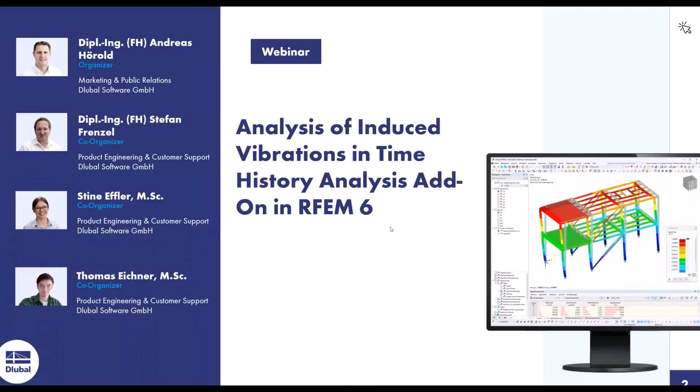So hopefully you can see my screen. Okay, we go directly to the content. As we said in the introduction, we want to have a look today at the new time history analysis add-on. I want to show you the features of the new time history analysis add-on in RFEM 6. So today I want to give you an overview of the dynamic analysis add-ons which we now have in RFEM 6 or RSTAB 9.

Then in the next step, we want to do a natural frequency analysis of a structure using the Modal Analysis add-on. This is part of the dynamic add-ons we have in the program. We want to do it for a building like the one you see on the screen, made out of concrete and steel.

The next step of our example is to perform a time history analysis with a machine-induced vibration. Therefore we use the Time History Analysis add-on to separate the loads, horizontal and vertical, and to give them a time stamp to get a result. When we are done with this, I want to show you how to optimize the structure in the case of resonance.

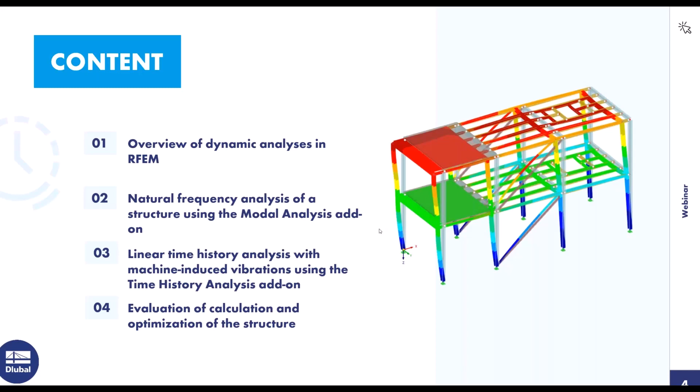Okay, so on the next one you see the add-on modules we have in RFEM 6 and RSTAB 9. The first one on the left side is the Modal Analysis. This is a basic tool in RFEM 6 to calculate the eigenvalues of the structure. You get the equivalent load factor and the eigenfrequencies of the structure, which is a really important tool, because to use the other dynamic analysis tools, you need the modal analysis.

The next one we released was the Response Spectrum Analysis add-on. With this add-on, it is possible to do a response spectrum analysis, for example in case of earthquakes. It's a linear calculation in this case.

Here you can, of course, choose a response spectrum according to a design code, for example the Eurocode or the US code or some other codes, what you want to use. You can also create your own response spectra, maybe also out of accelerograms if you want to do this, and then the program will calculate for each FE mesh point internally an equivalent earthquake load, and then you will get at the end, of course, the internal forces for the directions and also the combined reactions of the whole structure.

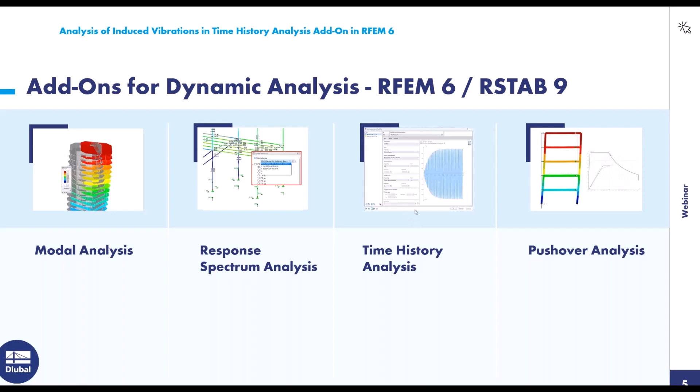And last but not least, the add-on module is the time history analysis add-on. In this add-on, you are able to combine time with loads and to get a result out of that. And this one we want to do today, and therefore I created a small example. This is our practical example.

It's a machine-induced vibration. So just as an introduction, that's a normal steel frame structure with the concrete surfaces on this side. And we have here a machine which induces a vibration on the structure with a rotating unbalance of 0.2 kilonewtons and a frequency of 5.6 hertz. And then we want to see what happens to the structure when we bring this load with the frequency on the structure.

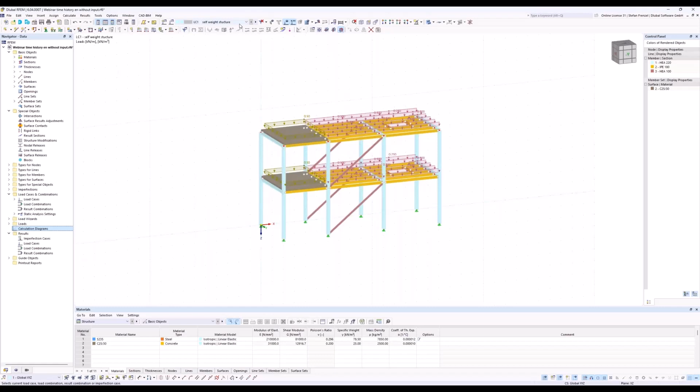Here in RFEM 6, you see at first our structure and also some loads, the self-weight of the structure. And I created also a self-weight of the machine in this case. And I created some horizontal induced load and a vertical induced load, this one and this one. I will show you later how to calculate this. But in the first step, we want to do a modal analysis for this structure.

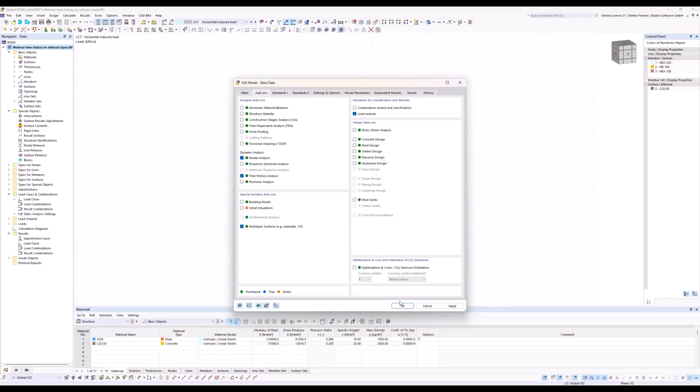Therefore, you are able in the program to go in the base settings of your file, and in the base data you are able to activate add-ons. In our case, we want to activate the add-on for the dynamic analysis, modal analysis and the time history analysis, because we want to use them afterwards also. You see that in RFEM 6 you are able to activate different add-on modules, for dynamic analysis, or for design of structures, for example for steel or concrete. You're able to switch them off and on in the add-on tab in the base data of the program. So in our case, we want to do this, and we say okay.

And now we want to do a modal analysis for our structure. How can we do this easily? That's the first question. Therefore, I go to the load cases and go at first on edit. You see that we have 4 different load cases. For my modal analysis, normally I need 2 load cases.

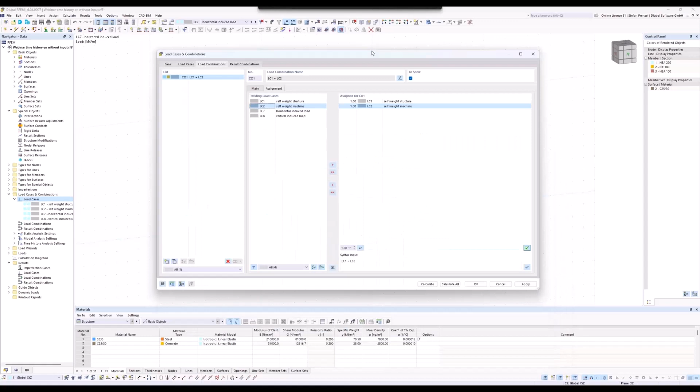That makes it a little bit different because here I have to create at first a load combination to assign these 2 load cases. I want to assign load case 1 and load case 2 because in this case I want to have a look on the eigenvalues of the structure when the self-weight of the structure and the self-weight of the machine is available, and therefore I took these 2 load cases for that.

It's not necessary to choose another static analysis setting here, because for the modal analysis we just use the masses which are in the vertical direction, or in Z direction. So therefore we can go back to the load cases, and here we create a new load case. It's load case number 9 now.

If you want to perform a modal analysis in the program, you just have to switch the analysis type to modal analysis. If you switch this, you will have a new option, which are the modal analysis settings. And of course, the program wants to know which self-weight or which load should be used for the modal analysis. If you have a load case with loads in it, the program will automatically convert the loads into masses. But it's also possible to create masses in the load cases, and then you can use these masses.

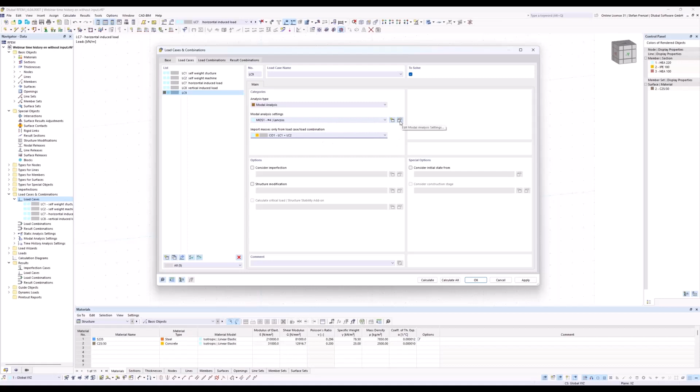In our case, we want to use load combination number 1, which is made out of load case 1 and load case 2 together. And these masses we want to use now for the modal analysis. I just have to go into the modal analysis settings, because for this modal analysis I need a number of modes. It's not 4, it's 30. So I need 30 eigenmodes for the calculation. I know this because I did it before, of course.

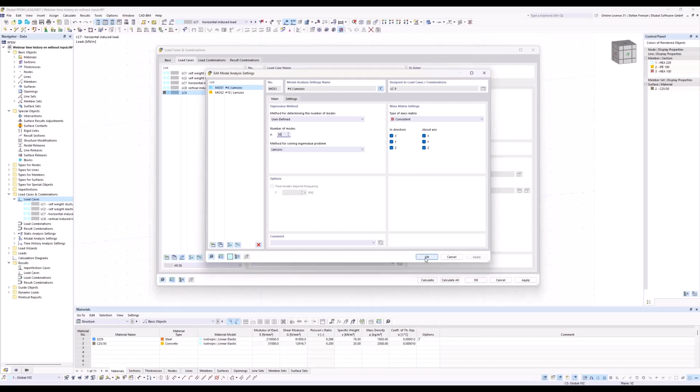Otherwise, you have to choose your own value, or you have to prove it, of course. The mass matrix should be consistent. That means the masses are distributed on the members via a function. That's normally the best way, because it considers the masses most exactly on the structure. Then we can click OK, and we can do a calculation.

Now you see the program will mesh the structure first, and then the program will calculate load case number 9. It's not necessary to calculate load cases 1, 2, or the load combination, because we just took the masses from these load cases or load combinations. Our first natural frequency you can find in the result navigator. Here you can switch to the eigenvalues. But here's a really good eigenvalue.

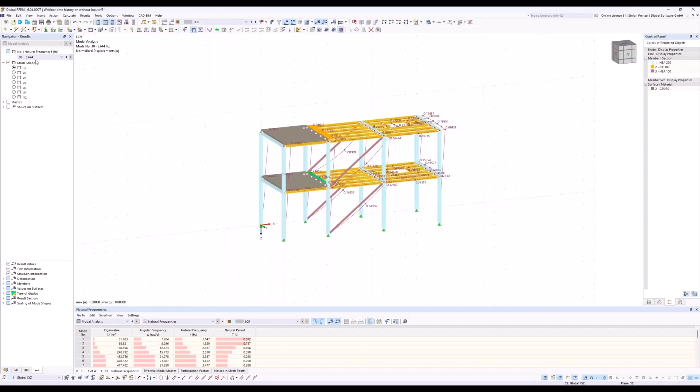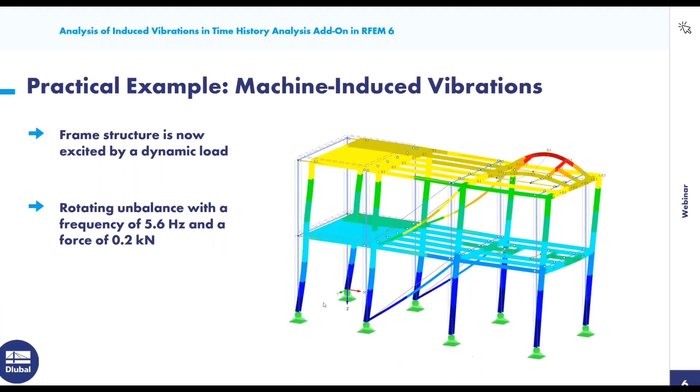It's also 5.6 hertz. It's like our induced vibration, and you can see the structure will move in x direction globally. That's normally not so good when you get this. So I will switch back to the presentation.

We have to define now the input values for the time history analysis. I told you that we want to use 0.2 kilonewtons as rotational mass, or as unbalanced mass of the machine. I have to calculate these 0.2 kilonewtons to the member length, and then we get 0.025 kilonewtons per meter. And this I bring onto the structure in load cases number 7 and 8. You see here the 0.025, and here also I just divided it by the member length where the machine stands on, and then I calculate this value.

If I go back to the input values, I have to define now two diagrams, one for the horizontal and one for the vertical. The difference between them is just a shift of pi/2. By the rotation of the mass, I have a vertical maximum load and a horizontal maximum load, and it's described by a circle. That means I have to use a sine function for that.

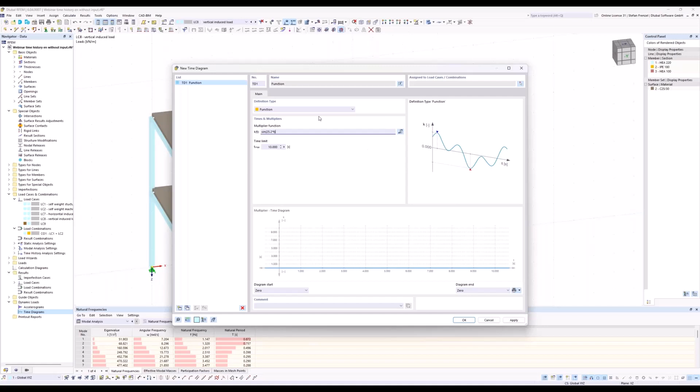The other option is that we can use a function. In our case, we want to use the function because it's a really easy function. It's just the sine of 35.2 multiplied by the time. That's all. And then you should get the result for it. So we want to get a sine function.

In this case, we don't call it function. I just want to call it horizontal part. Sorry, there's an R. Like this. And I copy the whole function again, and here I just add the value 1.5708 to get the shift. And I will change the name to vertical part.

So these two functions describe the induced vibration of my structure. Nothing else. Here you see the shift between them. Here we start with a maximum, and in this one we start with 0. That's the same as in my circle: when I have a maximum force in one direction, then the force in the other direction is 0.

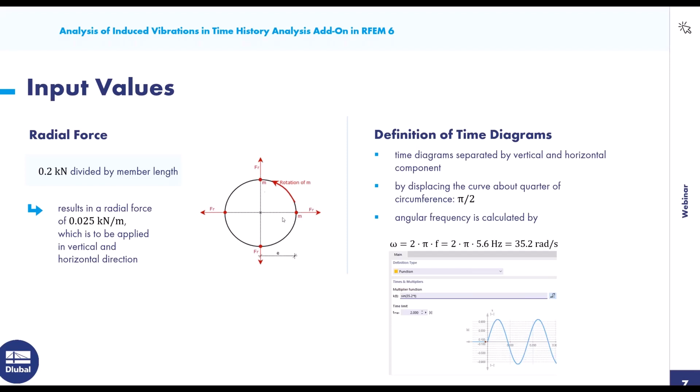And if I rotate further, by 90 degrees, then the other one is maximum and the first one is 0. Therefore, I use the function to get the same behavior, like in my presentation.

Sorry for the interruption. In the PowerPoint, you used 35 rad, and here... Oh yeah, that's correct. 35. That was my fault, just a typing error on my side. No, I also have it on my paper here, 35.2. Okay, thank you for the interruption. Then we can go on. I changed it to the value 35.2.

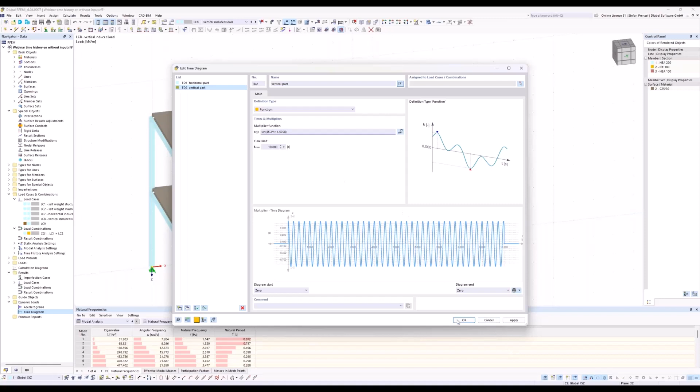In the next step I want to show you that we have an angular frequency of 35.4, which is near 35.2. That means I could get a resonance in the whole calculation, because of the horizontal part, my horizontal load. If I look at this eigenvalue, I go to load case number 9 and see a deflection also in the x direction. So you have to be careful; there could be a resonance in the structure.

So with this knowledge, we go now to the time history analysis to show, hopefully, that there's a resonance in the structure. Therefore, we create a new load combination, and in it we can change the analysis type to time history analysis. That means we can assign load cases, and to each load case we can assign a time diagram.

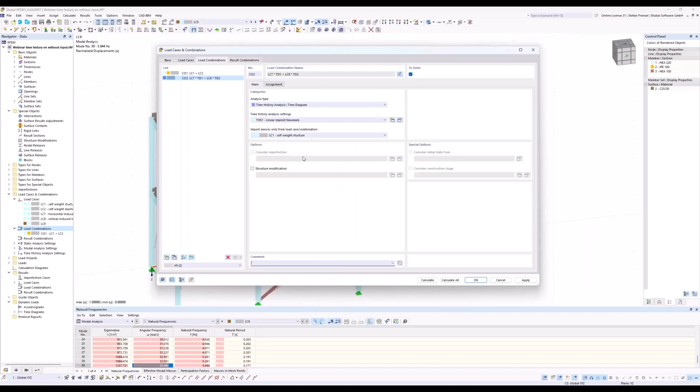And that's our input. We have a horizontal load with a time diagram, and a vertical induced load with the vertical part of the time diagram. That's normally all, because now we can induce the machine unbalanced load to the structure over time.

We just have to change some time history analysis settings, because here we want to use the linear modal. The damping should be 0; we don't need damping at first. For the maximum time, it's okay to take 5 seconds.

The split safe time steps should be 10. That's a good value, and that's normally all for this one. Then we can say here, okay.

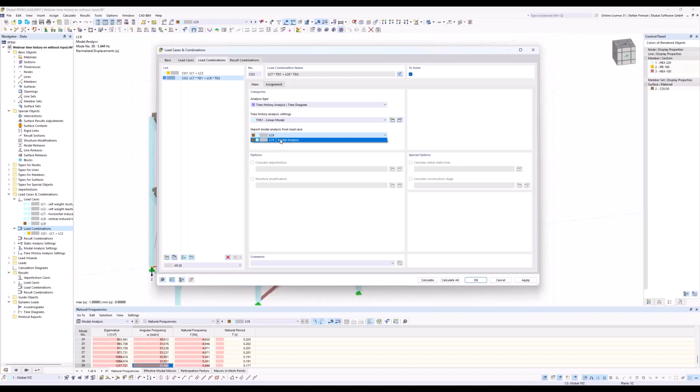If I use the linear modal analysis for the time history analysis, I have to choose here the result of a modal analysis. That means for me, I just have one load case with a modal analysis, so I can just use this one. Then we can click on OK and calculate the whole stuff.

The program will now perform the time history analysis over 5 seconds with a delta t of 0.01 seconds. There will be a lot of results created, but in this case it's necessary because I have 5.6 Hertz as induced vibration, and therefore I need a small time step.

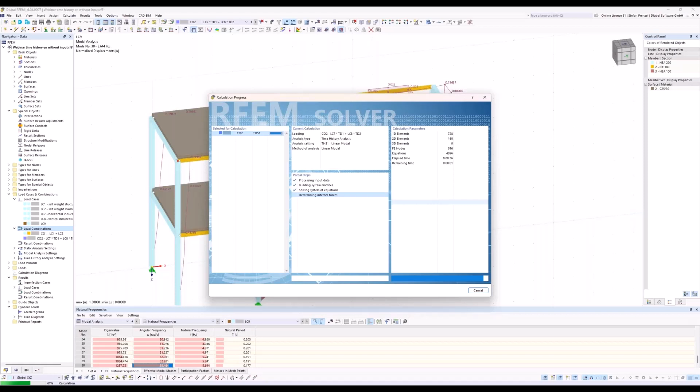So, okay, 35 seconds, it was not so long. Okay, so what's the result of that now?

The results are also like in RFEM5, or like in the old program. You get the results here as a summary in the global table of the structure, and maybe some of you know or used the old one, where it was possible to create also directly a diagram.

Now it makes sense to have a look at a diagram, because here I can't see anything. I can switch through my time steps, but that doesn't make much sense, because normally I pick one point and want to see this point over time. What happens to this point?

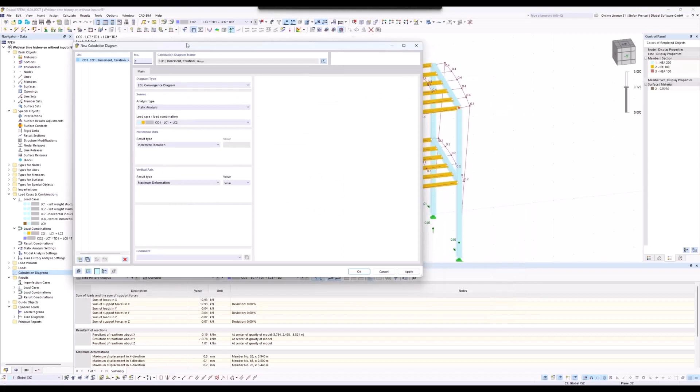For this, we have calculation diagrams, which you can find in the data navigator. If you click on new calculation diagram, you can say you want a basic diagram, 2D. We want a diagram from the time history analysis, load combination number 2.

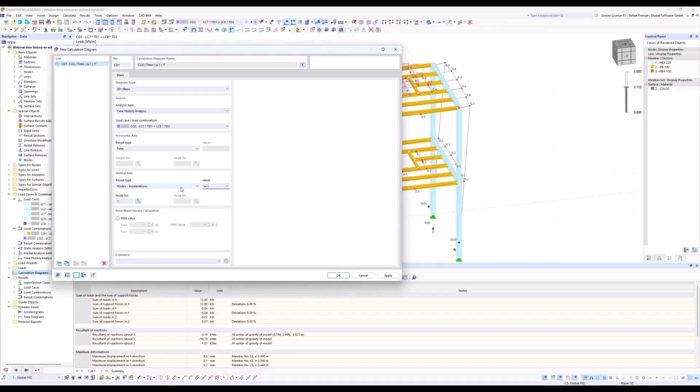That's correct. Here, for example, I want to have a look at the node's accelerations. That makes sense normally, so I take this one, okay, and I just have to click on a node. Maybe I want to look at this node.

That looks not so nice. Maybe we take this one. No, wait, X. X looks nice, so the X direction. The other one here is made out of all directions, therefore it looks a little bit strange.

In our case, we should look at the acceleration in X direction, and here we can see a nice picture of a resonance calculation. The resonance is really high.

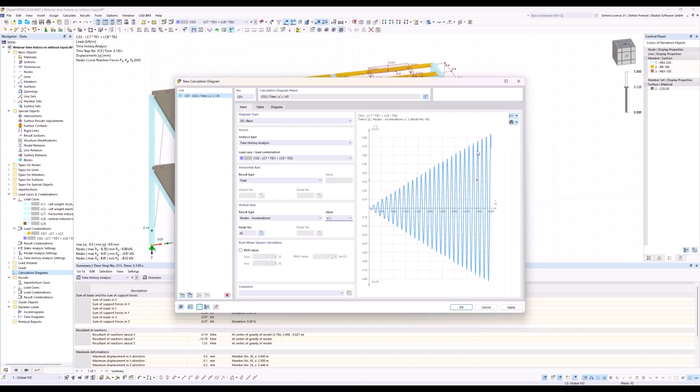So we will get a resonance in the structure, and that's not so good, because now our structure can get a failure by this.

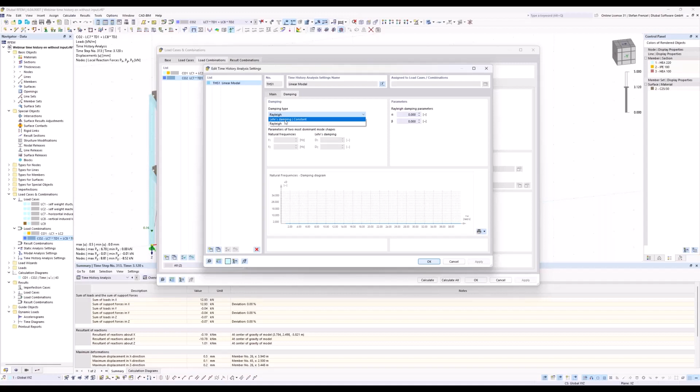What we can do now is go to our load combination number 2, and say, okay, normally if you do a time history analysis, there is also a damping. Here in our case, if we use the modal analysis type, or the linear modal analysis for the time history analysis, we are able to use the Lehr's damping.

I want to use a damping of 0.02. If I use here not the linear, if I use the linear implicit Newmark solver for that, then I'm just able to use the Rayleigh damping coefficients. Therefore, I have to calculate them first. This is easier because you also find it in the literature.

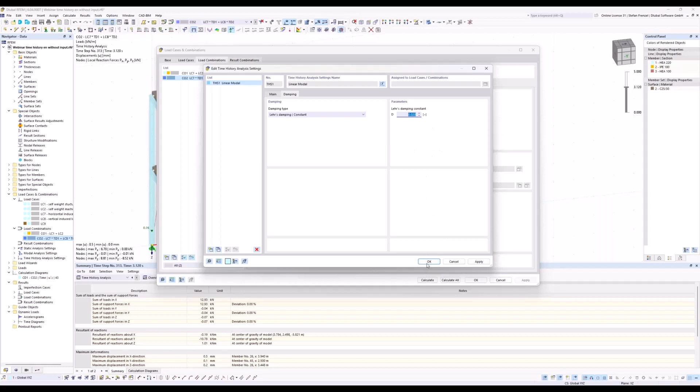You find damping values, or Rayleigh damping values, for structures made out of steel or concrete. In our case, we want to use 2% of that, and then we just have to recalculate the whole stuff. That means we just calculate load combination number 2 again, and then we will hopefully get a result as well.

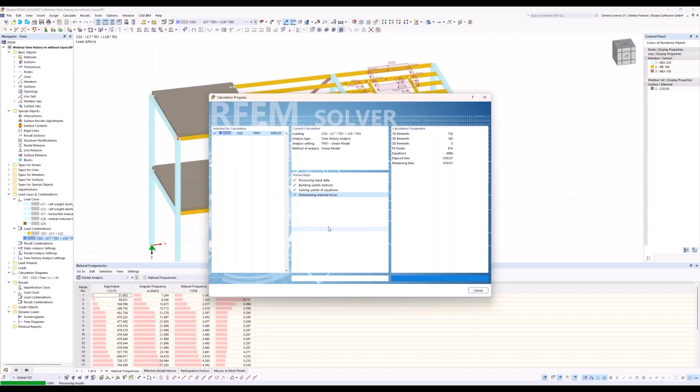So, okay, now we are nearly ready. Okay, so we see that we see nothing.

So really, that's why we go back here in time on the calculation diagram. And within the calculation diagram, I see now here a maximum of 0.24 meters per square second.

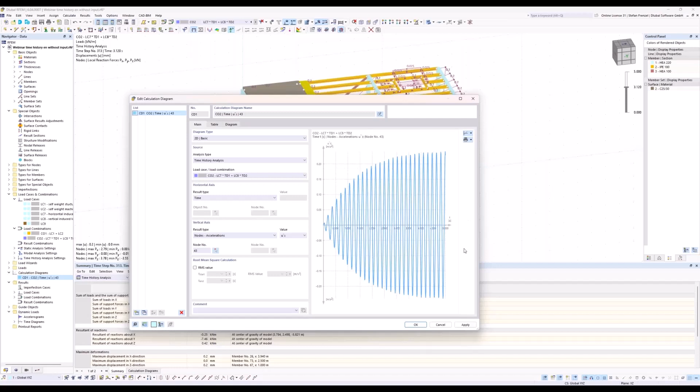That's of course a high value, and that could be, of course, also by using the damping, that it's not sufficient for us or for using the whole building like this. So now we come to the point where we have to optimize normally the structure.

One optimization could be we use another machine, because if we have another induced vibration, then maybe it could work. But normally, it's also possible to change something in the structure.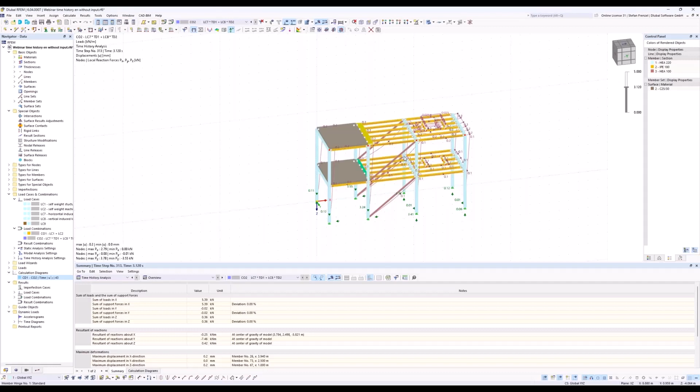Here in this structure, I want to change the bracings because here maybe I took here another axial stiffness for these ones. Then of course the eigenvalues of the structure will change, and hopefully it's then possible to use the same machine, maybe with another bracing or another cross section type for that.

But how can we perform such an analysis? Therefore, we have to go at first into the special objects. In the special objects, we are able to create here a structure modification. A structure modification could be here for sections.

In our case, we want to change the sections, and we know that our HEA 100 is here the bracing. Here we want to use, for example, double the stiffness of the area, or we want to use the double area for that.

That means for us, of course, the axial stiffness will be doubled. And another option could also be that we copy the structure modification and say, okay, maybe we take just half of the stiffness for that. Could be also an option for us, because an HEA 100 is maybe too big, this cross section type, in this case.

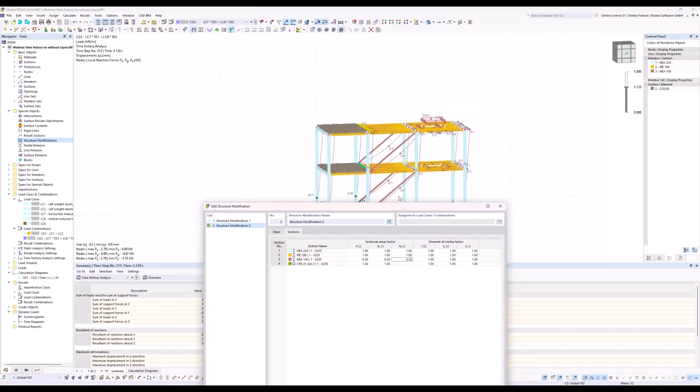So here we created now 2 structure modifications. I will change the name here, I will call it double stiffness. And I will call this here half stiffness.

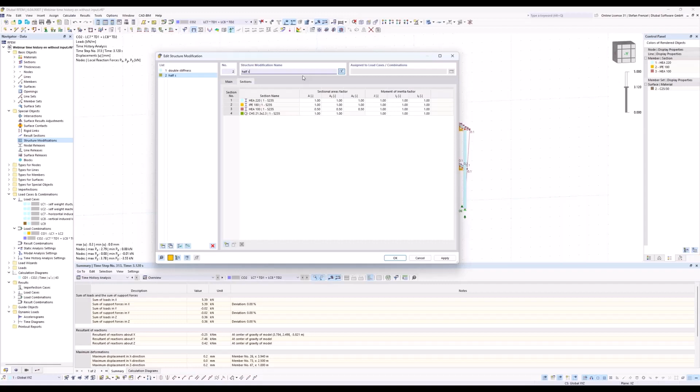And that's all for us. And now I want to consider this double stiffness or this half stiffness in the calculation of the time history analysis. So therefore, I have just to edit my load combination or my load cases, because here for my load cases, I have to consider now also the stiffness modification.

That's also really easy, because here I just have to copy load case number 9 to load case number 10, and here I want to have the structure modification double stiffness. Then I copy it again, and here I take, of course, the half stiffness of that. That's all for it here.

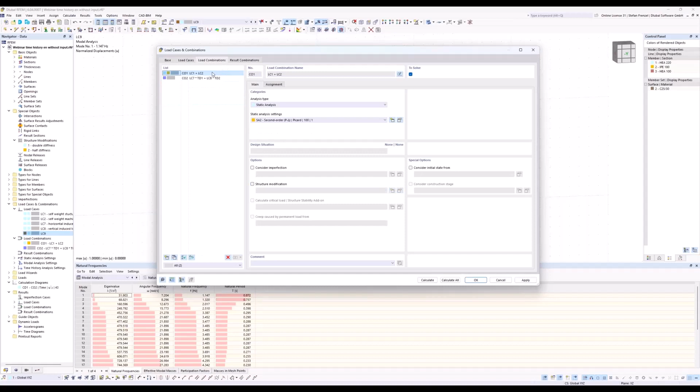For the load combinations, of course, I have to do the same. Therefore, I can go here in the load case or in the load combination. I just copy the load combination and say, okay, here I want to have load case number 10.

If I choose here load case number 10, the program knows that in load case number 10, a structure modification was used. And therefore, the structure modification is also used here in this load combination again. If I copy this load combination again and say, okay, here I want to use 11, then the program will automatically take the half stiffness, because this one was used in load case number 11.

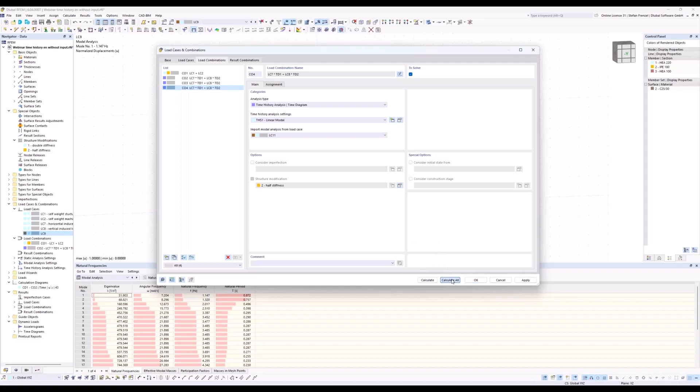Okay, and that's all. Now I can go on and calculate. So you saw that the program will calculate at first load case number 10 and 11 because they are essential for combination number 3 and number 4. So it's not possible to calculate load combination number 3 and 4 alone. Therefore the results have to be calculated first, and this was done in load case number 10 and number 11.

Okay, then the program will do the calculation. I think it will not take so long.

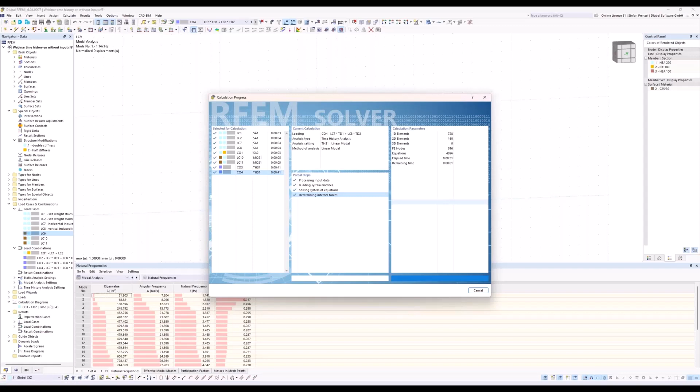Okay, and now we have the results here. So then maybe we can have a look on that at first. Therefore, we can go to the calculation diagrams and edit them.

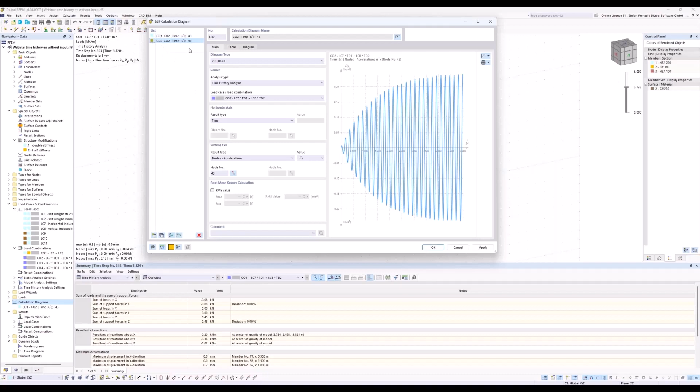Then I will just copy this calculation diagram, and here I will choose combination number 3. You see that at the beginning it's the beginning of the induced vibration, and after this beginning, the structure will vibrate with constant values normally.

But you see that the accelerations are really small, so small it's not possible to have a look here directly on them. So it's normally nothing. This is the result when I do it here with the double stiffness of the bracings.

If I use here the half stiffness of the bracings, then the result looks like this. So that means if I use smaller cross sections for the bracings, I get an acceleration which is also really small, 0.03 instead of 0.2 meters per second squared.

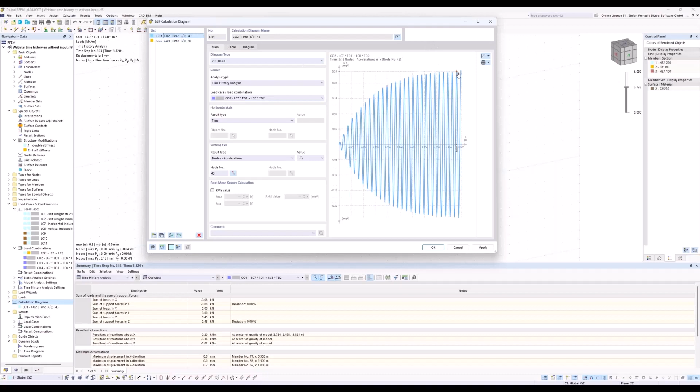And therefore you can also choose maybe a smaller or a bigger cross section. That depends on you and maybe also on the stress level of the structure. But normally these bracings could be really small because you just need the axial forces in it, since they are hinged at the start and the ending, so it's normally not so necessary to use big cross sections.

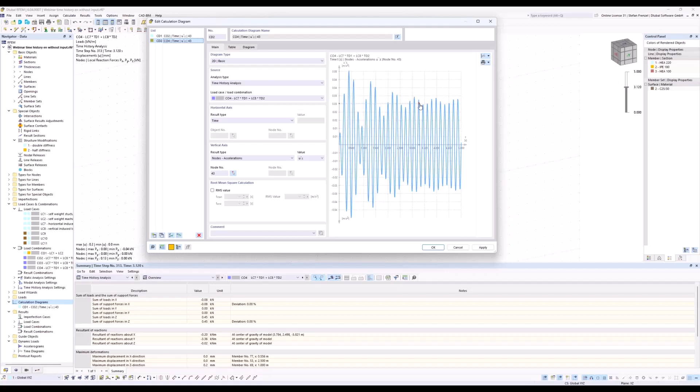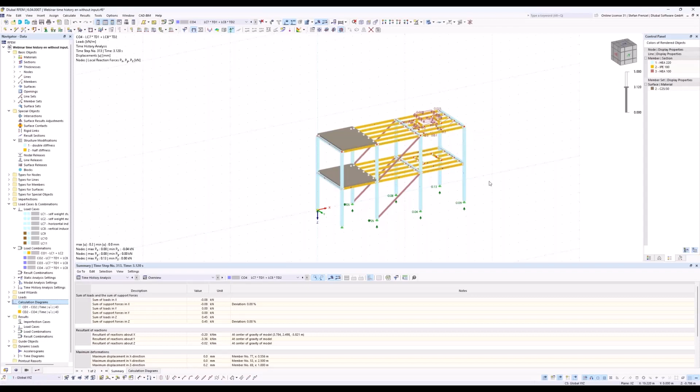So in this case, just by changing the bracings, you will be able to work also with this machine on this structure, because the induced vibration of this machine is then not necessary anymore for the structure. But it's always good to have a look on such things, because nobody could notice that we get here an induced or a resonance case, like here for such a machine when I put it on the structure. And therefore you can design such a structure just by choosing other cross-section types or using the structure modification to get a result for the structure which is usable at the end.

Okay. Andreas, are you there? Sorry, I had to unmute myself. Thank you for the presentation, I hope it's clear now.